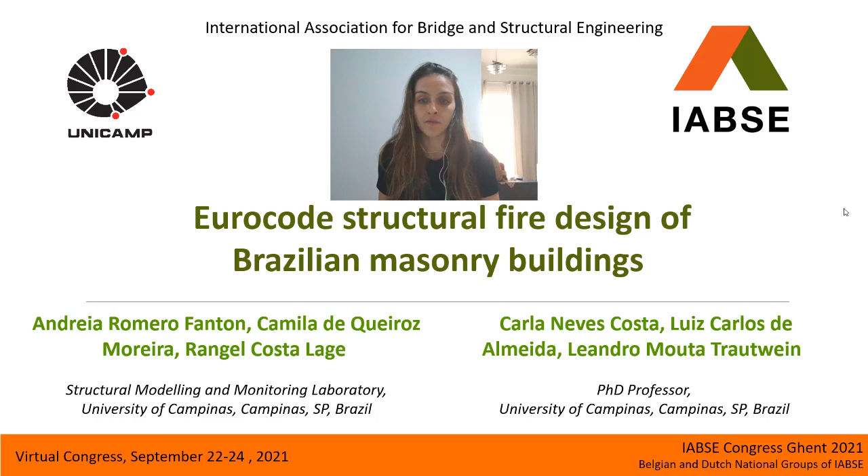The topics of this presentation are Introduction, Masonry in Fire Situation, Brazilian Recommendations, Eurocode Recommendations, ACI Recommendations, Australian Recommendations, masonry in room temperature, and the case study.

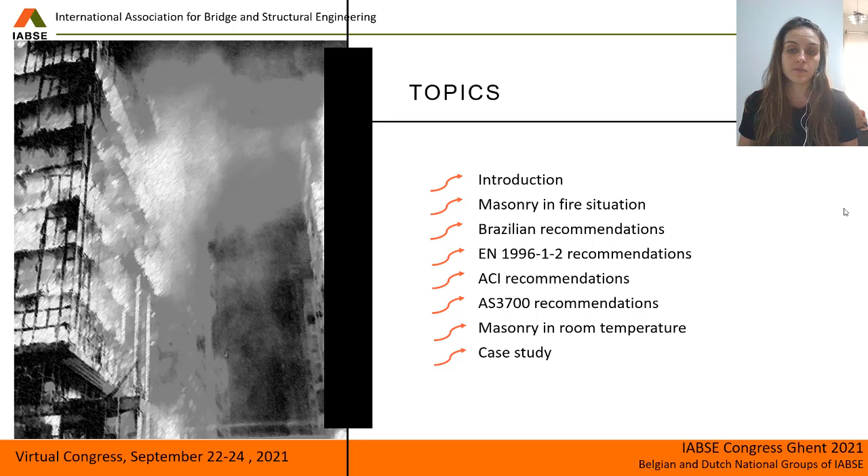In Brazil, there is an increase in the demand for housing construction, and there are several construction techniques to do this. Structural masonry is a more economical, modern, and rational construction practice. But we need to know the behavior of masonry structures in case of fire, at the structural and material scale, considering the large number of descriptive parameters.

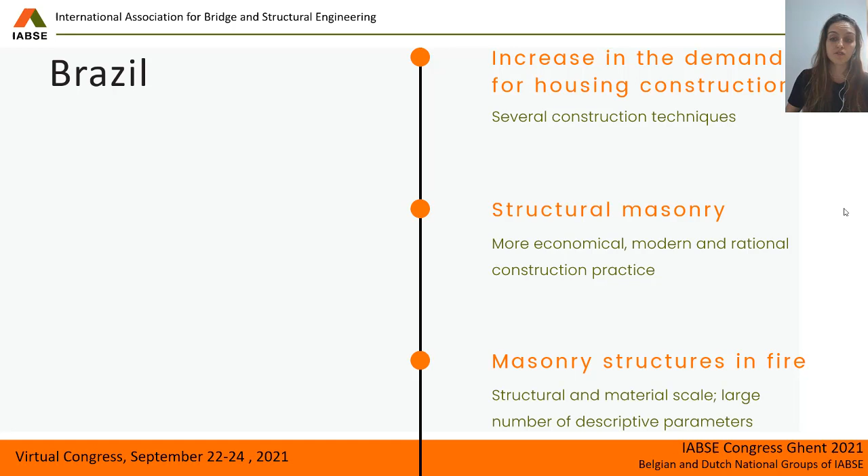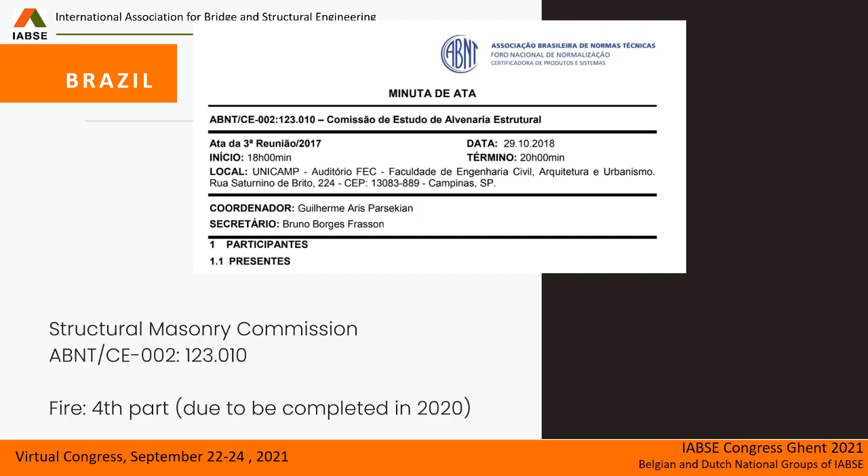In Brazil, there is no specific Brazilian standard for structural fire design of masonry structures. The Building Fire Safety Regulation of the State of São Paulo instructs the use of Eurocodes in the absence of a specific national standard for structural fire design. The Brazilian Study Committee is drafting the base text for a next standard to cover this gap regarding the fire behavior of structural masonry. This paper develops a case study for dimensioning a Brazilian structural masonry building.

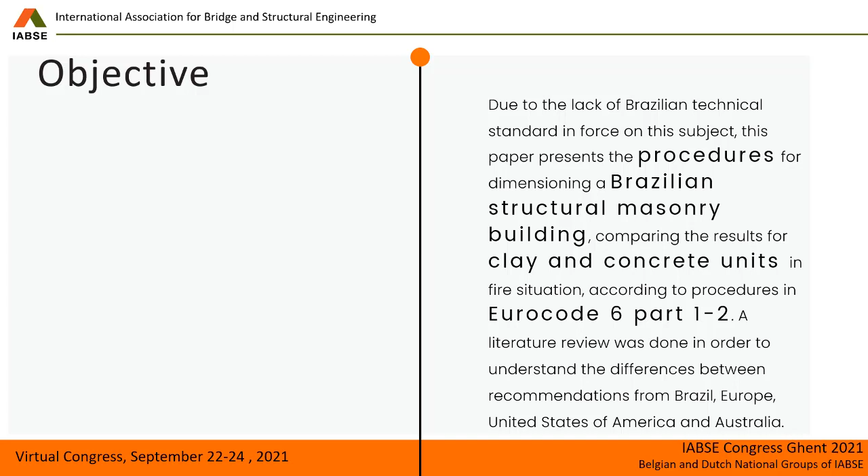We compare the results for clay and concrete units in fire situations according to procedures in Eurocode 6 Part 1-2. A literature review was done in order to understand the differences between recommendations from Brazil, Europe, the United States of America, and Australia. So let's understand the behavior of masonry in fire situations.

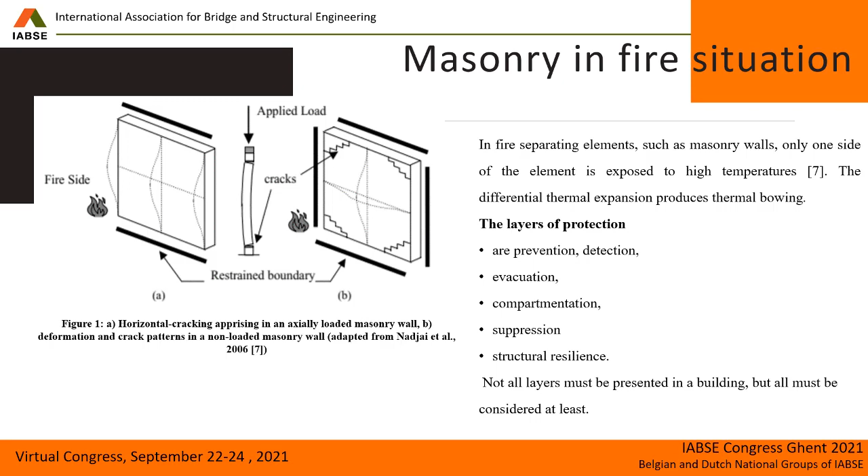In fire separating elements, such as masonry walls, only one side of each element is exposed to high temperatures. The differential thermal expansion produces thermal bowing. The layers of protection for these materials are prevention, detection, evacuation, compartmentation, suppression, and structural resilience. Not all layers must be present in a building, but all must be considered at least. Here we've made a summary of all the international codes that present something about designing masonry structures in fire.

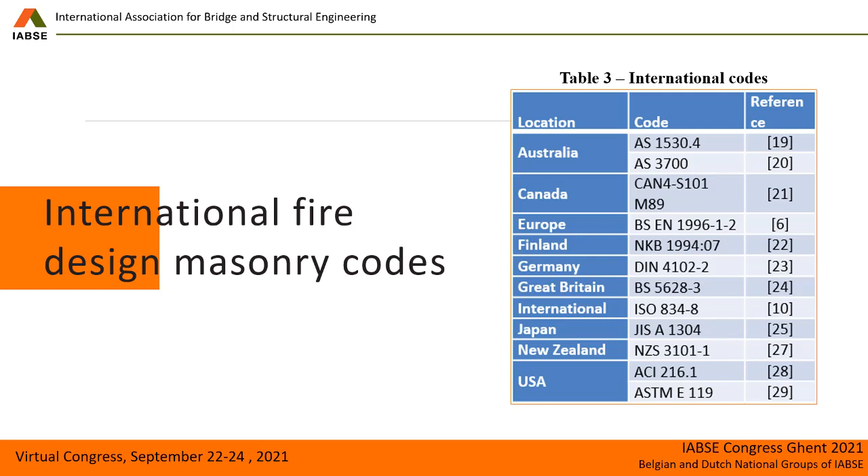First of all, we are going to understand the Brazilian recommendations. The vertical sealing system needs to follow minimum fire requirements.

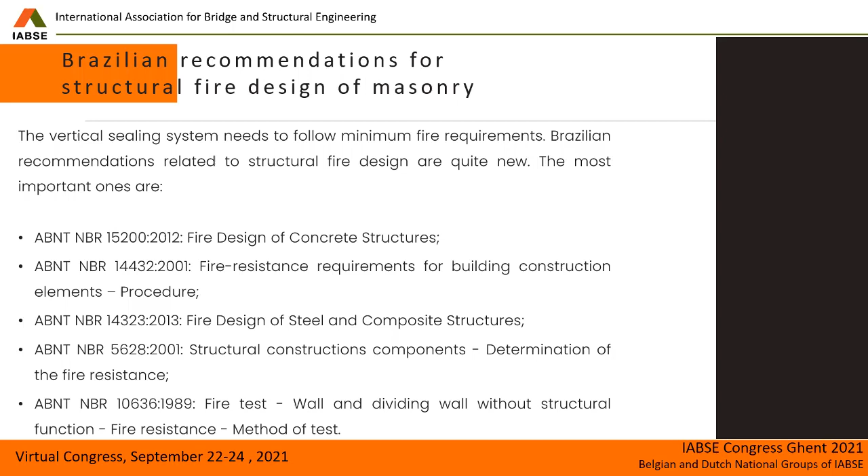Brazilian recommendations related to structural fire design are quite new. The most important ones are: fire design of concrete structures, fire resistance requirements for building construction elements, fire design of steel and composite structures, structural construction components determination of fire resistance, and fire test of wall and dividing wall without structural functions, fire resistance method of test.

Now we are going to see the recommendations from Eurocode. The basic requirements formulated for masonry structures in case of fire include load-bearing capacity, the R function; integrity, the E function; and thermal insulation, the I function.

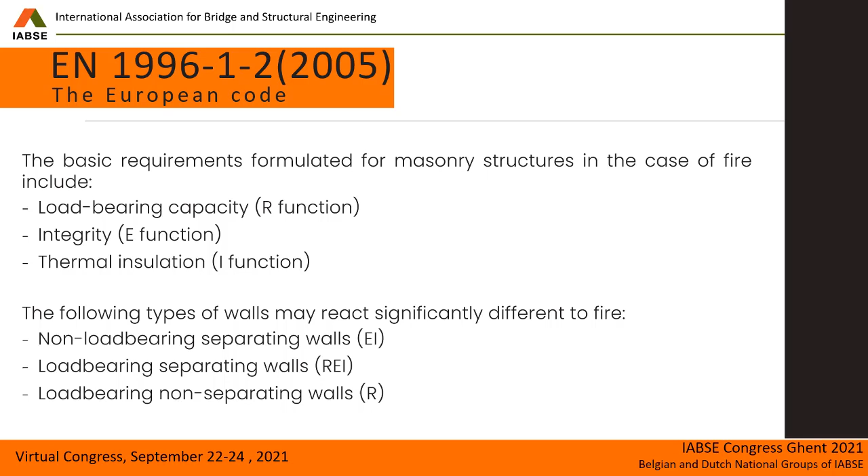The following types of walls may react significantly differently to fire. Here we have a summary of fire models and structural models related to this. From fire models we can have nominal curves and parametric curves, and also gas temperature non-uniform in a compartment, which forms multi-zone models, and real fire models. From structural models, we can do member analysis, subframe analysis, and global analysis.

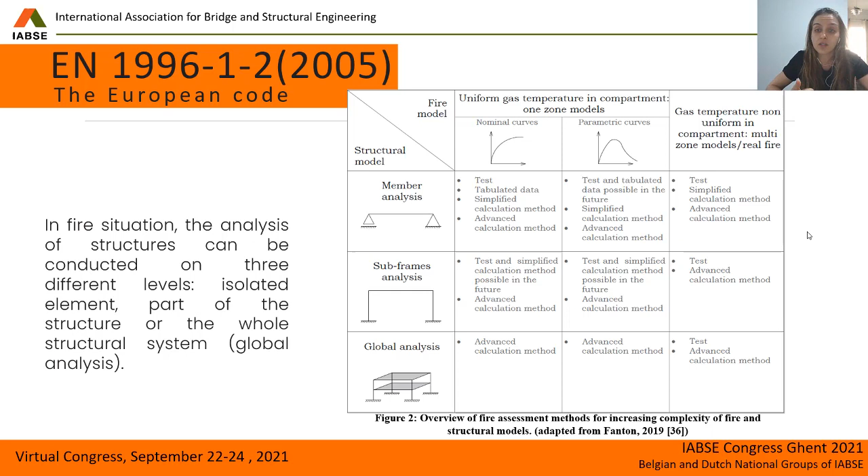If we combine parametric curves and member analysis, we see that in the future it will be possible to do tests and use tabulated data. But for now we can do a simplified calculation method and an advanced calculation method.

Now the ACI recommendations: in ACI, the equivalent thickness of a masonry wall is the sum of the equivalent thickness of the block and the equivalent thickness of its finish.

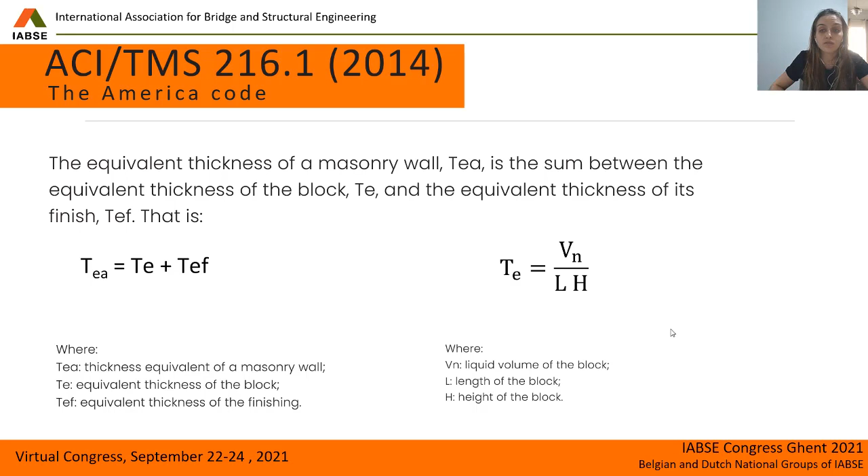The Australian Code presents two options to design masonry walls subjected to fire. The first is a tabular method, respecting tabulated thickness limits, wall slenderness, and reinforcement cover. The second is a method based on laboratory tests, using design abacuses provided by block manufacturers.

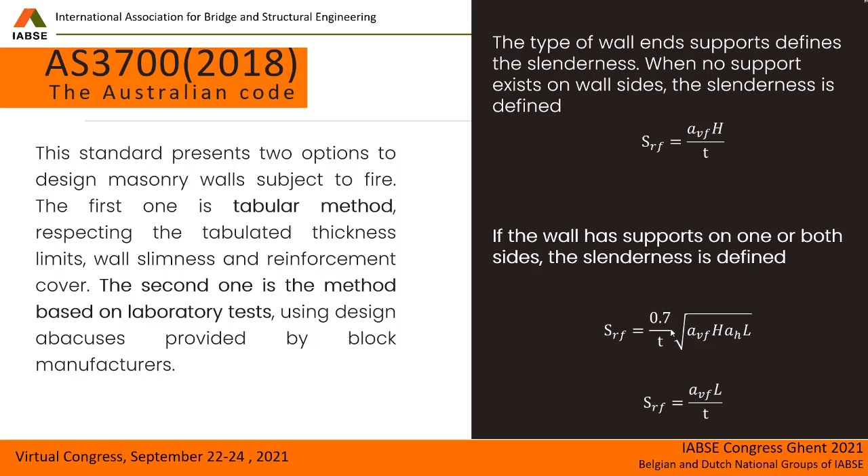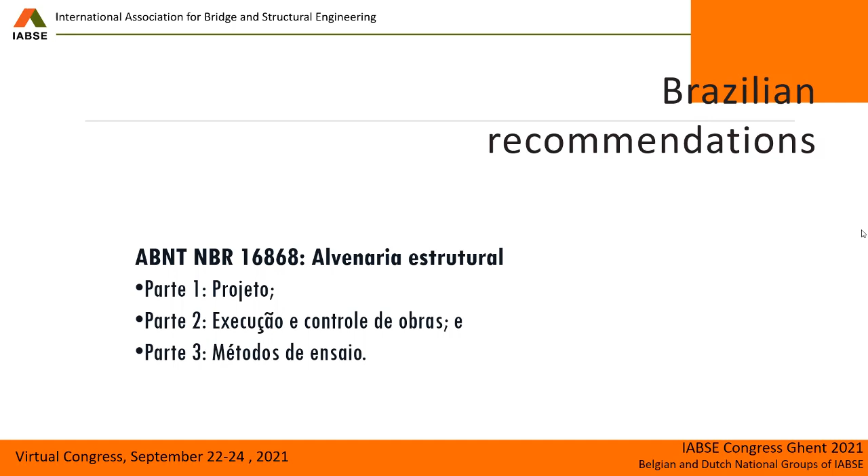So let's get started with masonry in room temperature situation - how does this work in Brazil? In the past, Brazil had two different standards to analyze structural masonry: one related to concrete units and the other related to clay units. But now we have a new standard which covers both unit types, concrete and clay.

As a common practice in Brazil, all the walls were taken as structural masonry. The wall thicknesses chosen in the preliminary design process were 160 millimeters and 140 millimeters for the blocks, and 10 millimeters of cement and sand applied on the faces.

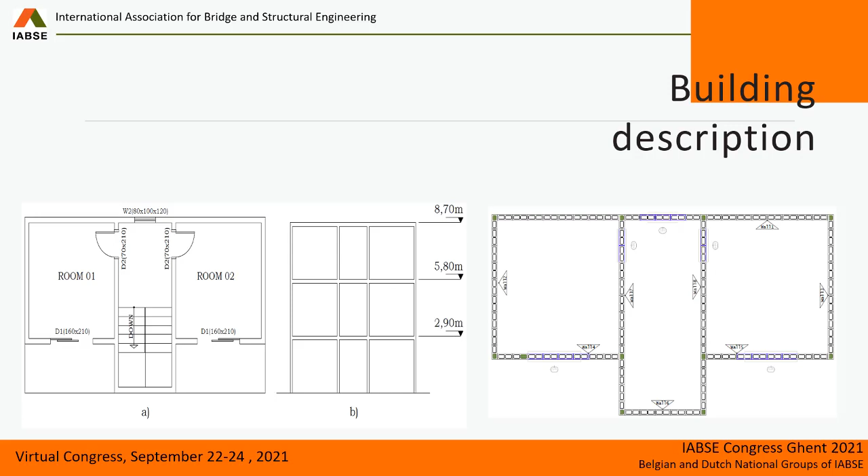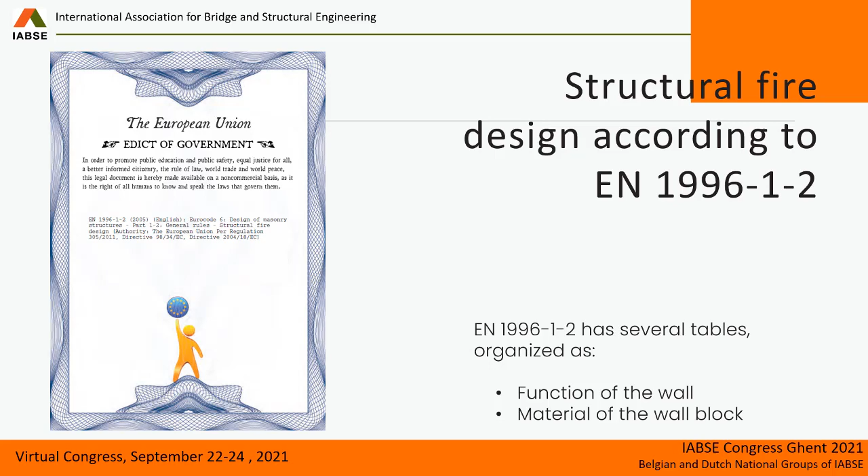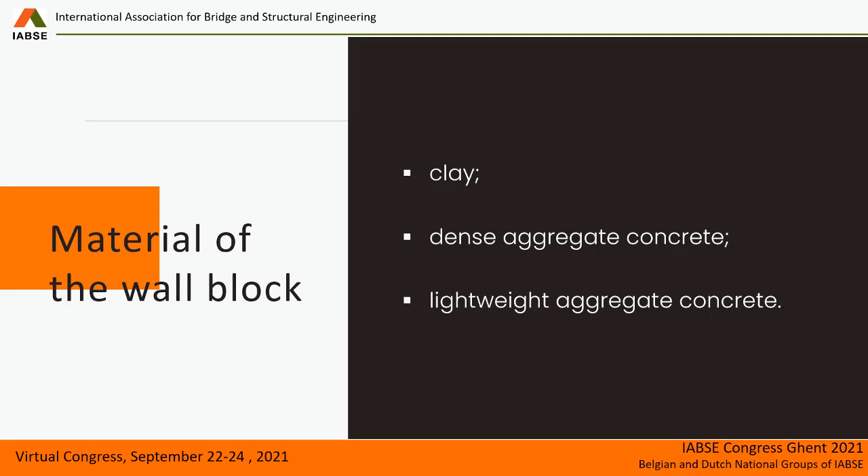The Eurocode has several tables divided according to the compressive strength of the blocks, the density of the blocks, and the related design load in the fire situation combination and the design resistance load. The material of the wall block can be clay, dense aggregate concrete, or lightweight aggregate concrete.

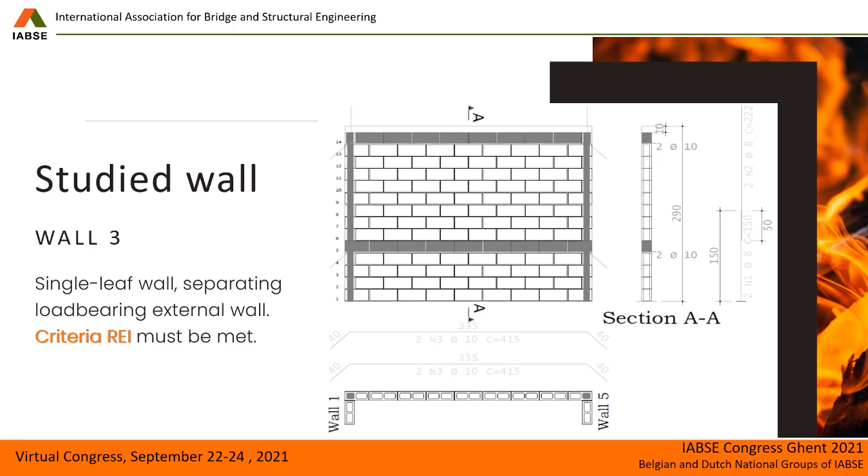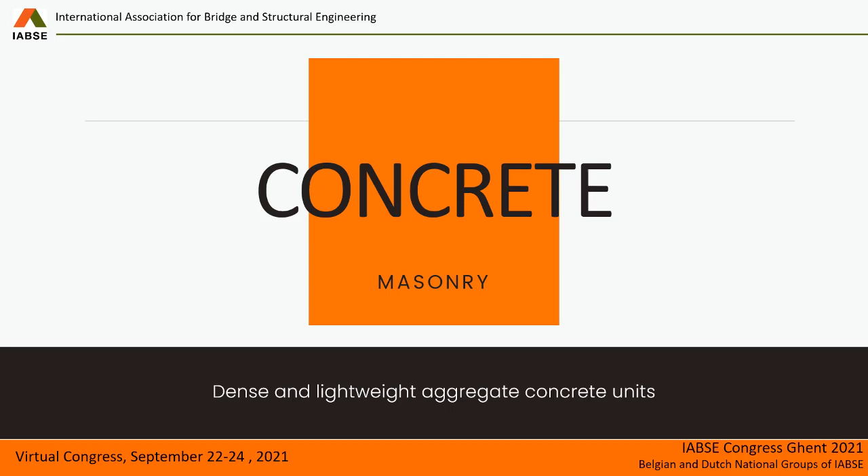The studied wall in this case study is wall 3 from our design. It is a single-leaf wall, a separating load-bearing external wall. The first analysis is going to be developed using concrete masonry, dense and lightweight aggregate concrete units.

Considering dense and lightweight aggregate concrete units, table N.B.3.2 of the Eurocode must be used. In Brazil, dense aggregate is commonly used, so it was considered in this case study. Because of this, the block strength in the net area is between 6 to 35 MPa, with a finish of minimum thickness 1 centimeter on both sides. For the wall studied, wall 3, criteria REI must be met.

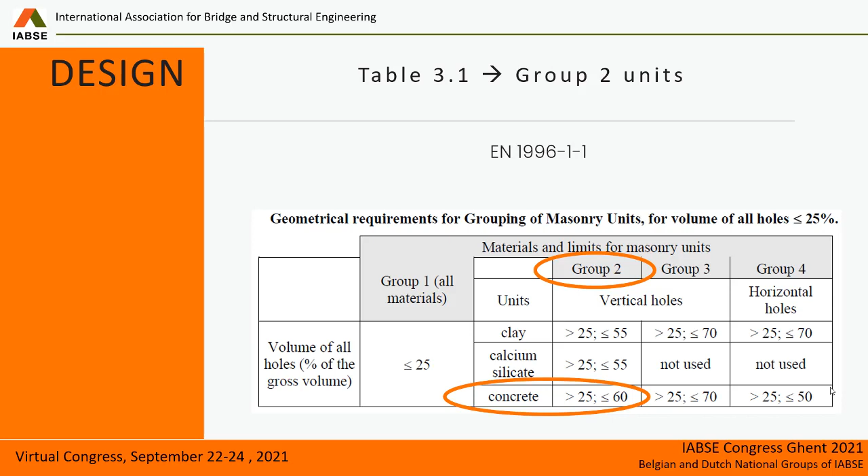We have two different functions: load-bearing function, avoiding premature collapse of the structure, and separating function, limiting fire spread beyond designated areas. Concrete unit masonry in this case study has vertical holes with void volumes between 25% and 60%, as we can see in this table from Eurocode.

The compressive strength of the unit was taken as 10 MPa. Here we see that in the design we need to find Fk, using a constant from table 3.3 and the compressive strength of the mortar, Fm. So the Fk is 5.54.

The design vertical load resistance, NRD, is an equation multiplying the capacity reduction factor, the design compressive strength of the masonry, and the loaded horizontal cross-sectional area of the wall. In this case study, we have all this information, with a height of 2.9 meters.

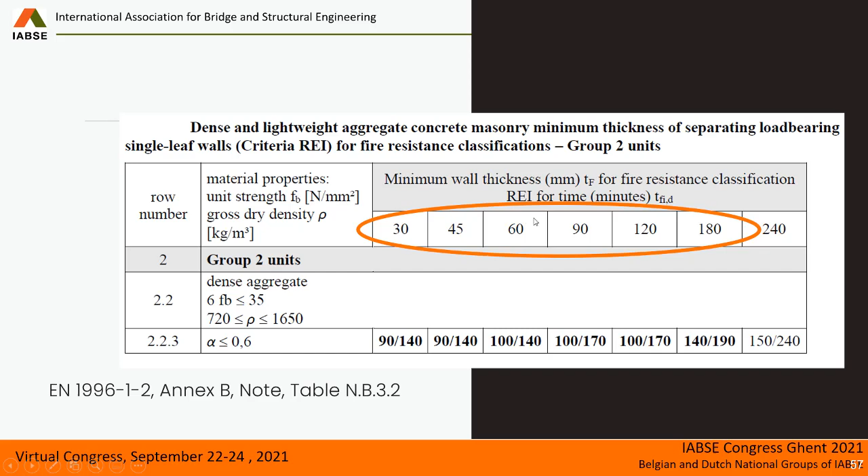So we find an NRD of 301.96 kilonewtons per meter. With table N.B.3.2, we can find the minimum wall thickness for fire resistance classification, remembering that we are in REI criteria, with results in minutes. In a Brazilian standard, we find that for this wall we need a 60-minute TRRF. In Eurocode, we find a time between 30 and 180 minutes. So our conclusion is that for a 60-minute TRRF, the building must have a minimum thickness of 100 to 140 millimeters.

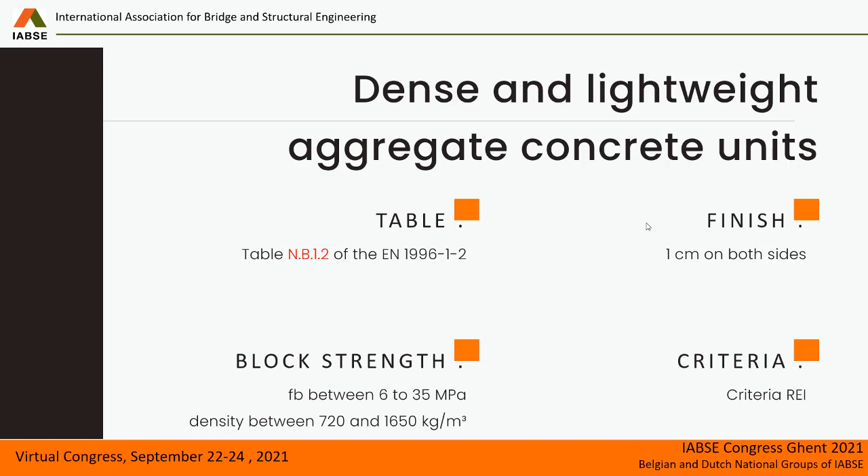Now for dense and lightweight aggregate concrete units, we are going to follow table N.B.1.2 from Eurocode 1996 part 1-2, and all the other parameters are the same. So here we are going to compare. We also have group 2. The compressive strength is taken as 6 MPa, so the Fk is going to change.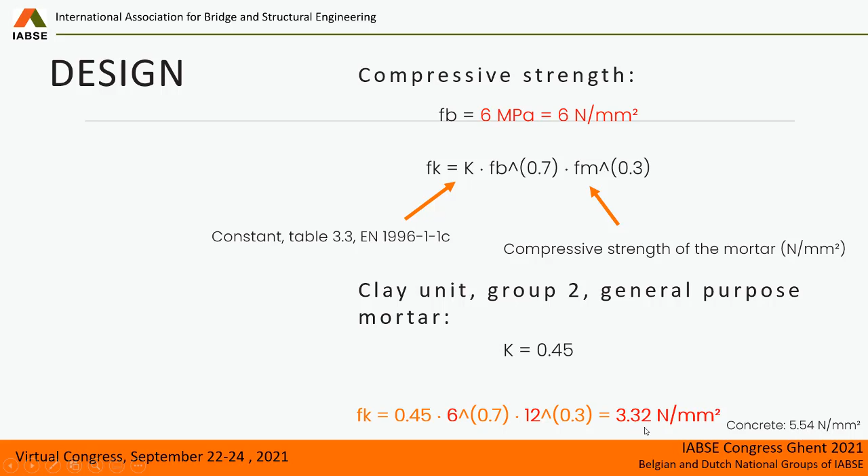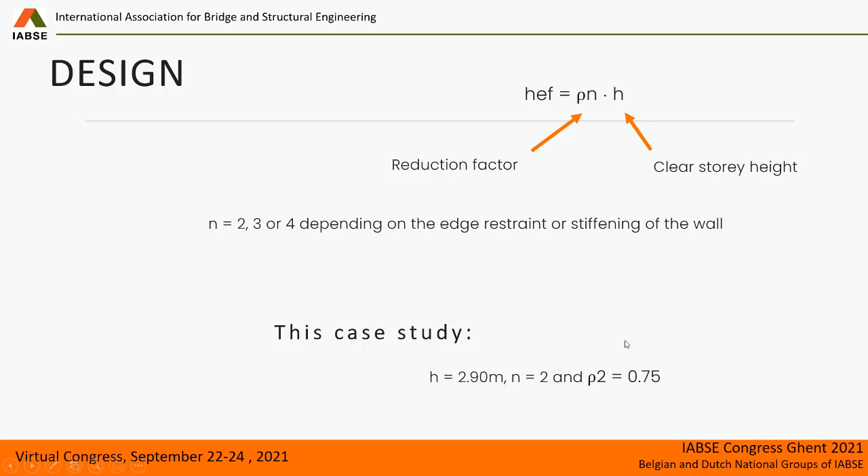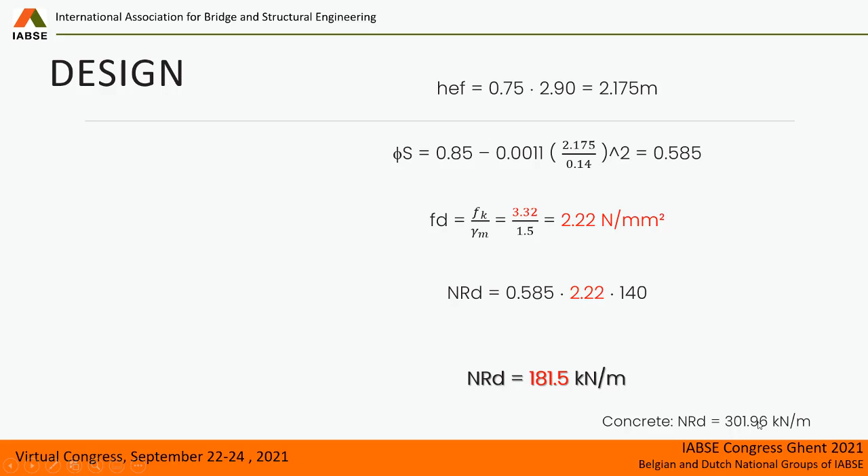We can compare here: for concrete we had 5.54, now we have 3.32. The design vertical load resistance is calculated the same way. In this case study, we have the same parameters here, so we are going to find an NRD of 181.5 kilonewtons per meter. Using concrete units, we had 301.96, which is bigger than the clay units.

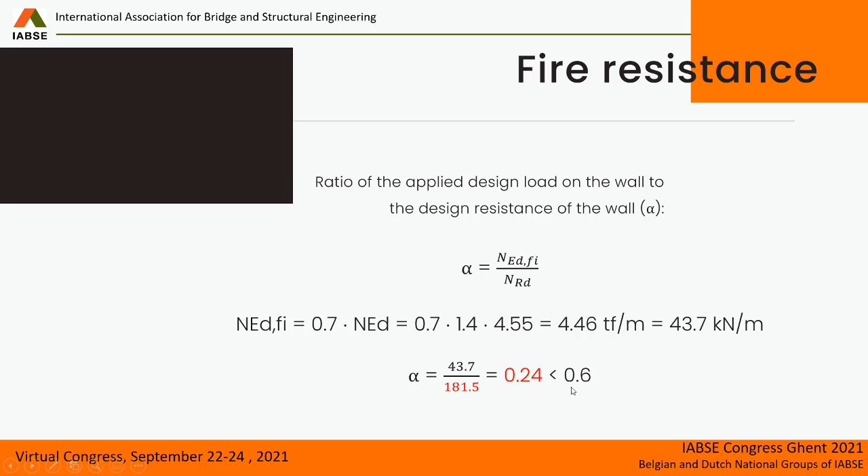The fire resistance is now calculated the same way, and here it is also smaller than 0.6. We need to find the minimum wall thickness for 90 minutes. For this, we have a minimum thickness of 100 to 140.

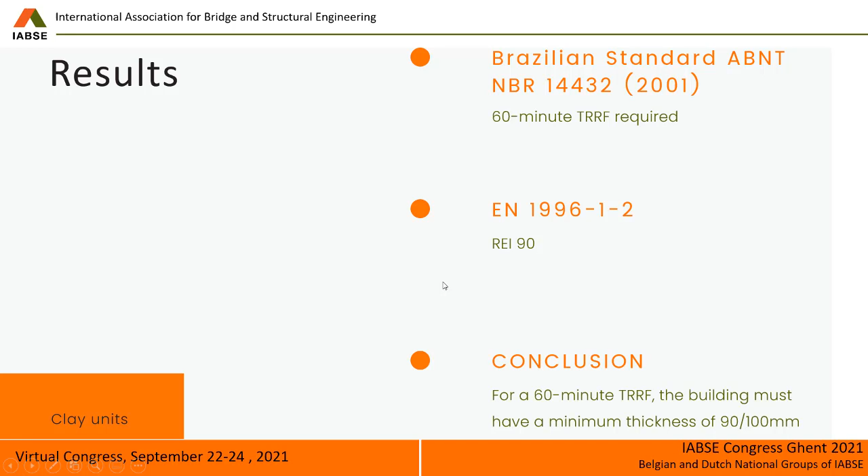So here, the same way, in Brazil the standard recommends a 60-minute TRRF. In Eurocode for clay units, we found 90 minutes. So the conclusion is that for a 60-minute TRRF, the building must have a minimum thickness of 90 to 100 millimeters. If we go back here, we find that for 60 minutes, we need a wall thickness of 90 to 100.

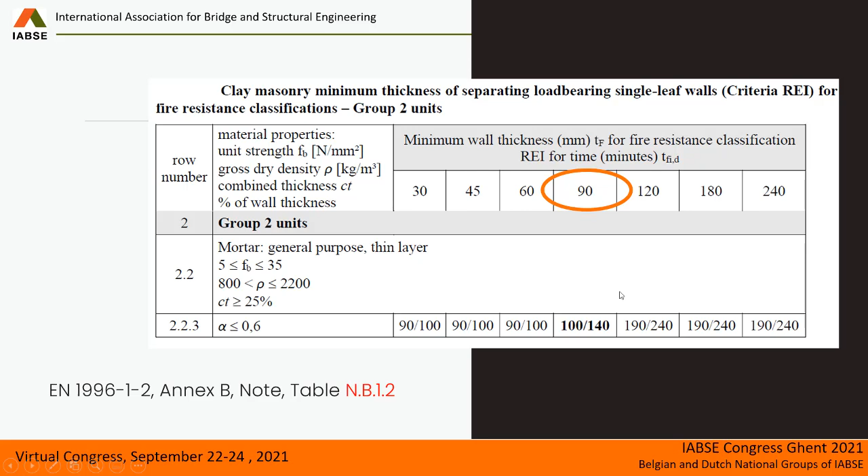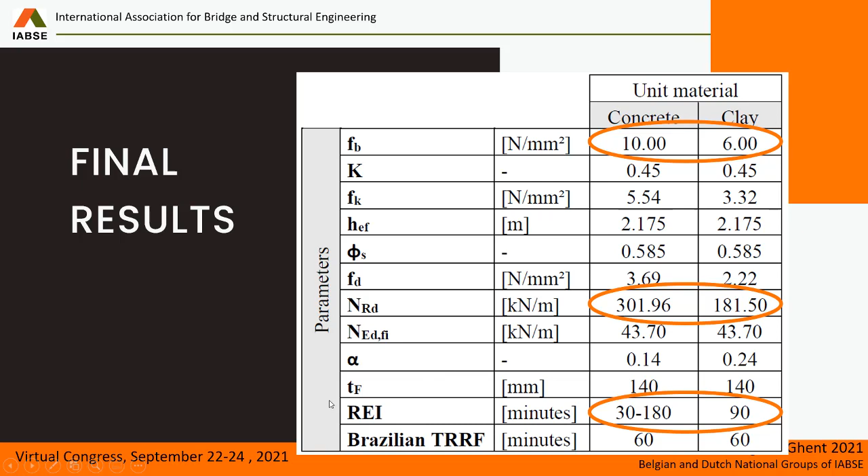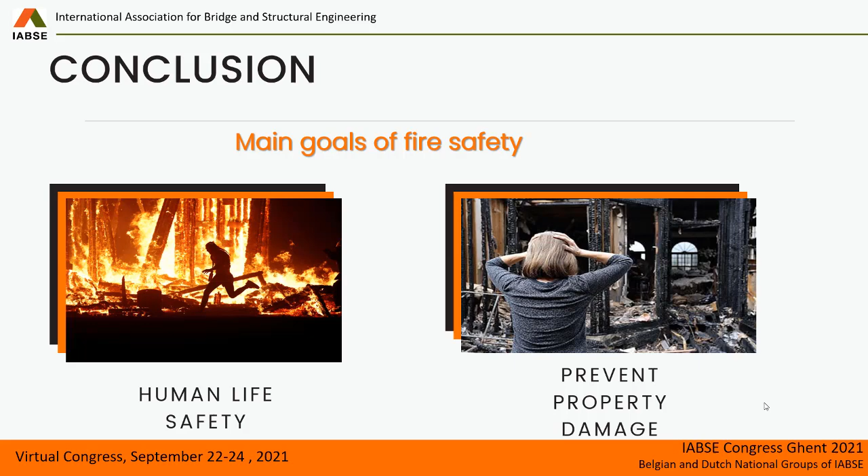The final result: here we compare some parameters. FB for concrete and clay are different, so the NRD are also different, and the REI time is truly different here. So the final conclusion is we need human life safety, and we need to prevent property damage. These are the main goals of fire safety.

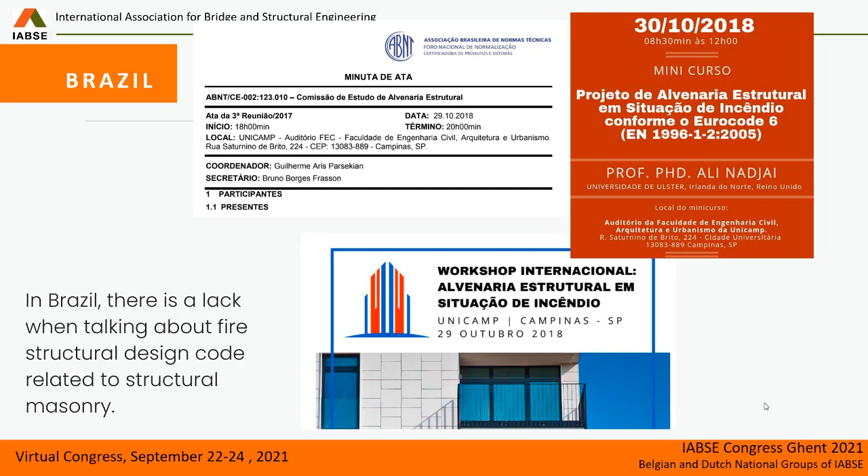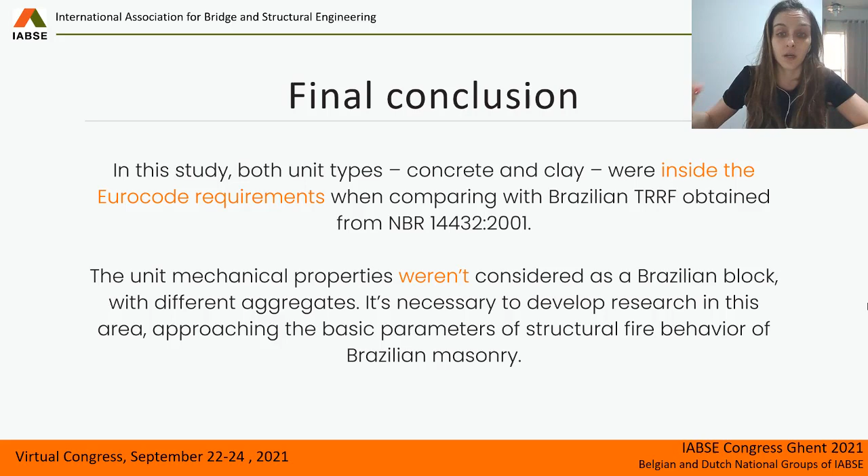In Brazil, there's a lack of fire structural design code related to structural masonry. So the final conclusion: in this study, both unit types, concrete and clay, were inside the Eurocode requirements when comparing the Brazilian TRRF obtained from our standard. The unit mechanical properties weren't considered as a Brazilian block with different aggregates. It's necessary to develop research in this area approaching the basic parameters of structural fire behavior of Brazilian masonry.

Comparing unit types concrete and clay, it can also be concluded that the concrete unit reached a bigger design vertical load resistance NRd, as expected. On the other hand, the clay units obtained a closer result for REI, 90 minutes, compared to the Brazilian code requirement. For a 60-minute TRRF, a Brazilian requirement, the building must have, per Eurocode requirement, a minimum thickness of 100 to 140 millimeters using concrete units, and 90 to 100 millimeters for clay units.